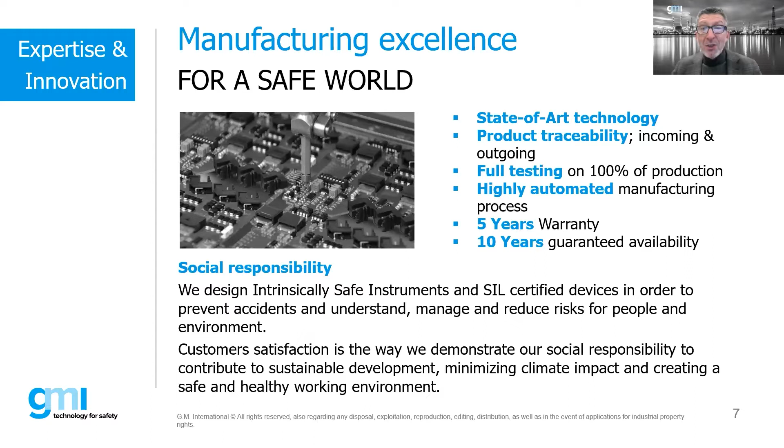I was discussing this with our new general manager the other day - our products are a very, very narrow portion of the overall cost of the plant, but they make sure the plant runs and remains safe. So they are important products, and we take special care in designing and manufacturing them.

These are the products: IS barriers up to SIL 3 certification, safety relays also SIL 3 certified with and without line monitoring. We have isolators, also SIL certified, power supplies that are ATEX, UL, and SIL certified. We have a line of multiplexers - temperature multiplexers, digital multiplexers, HART multiplexers - and we also run a line of SPDs and some loop indicators.

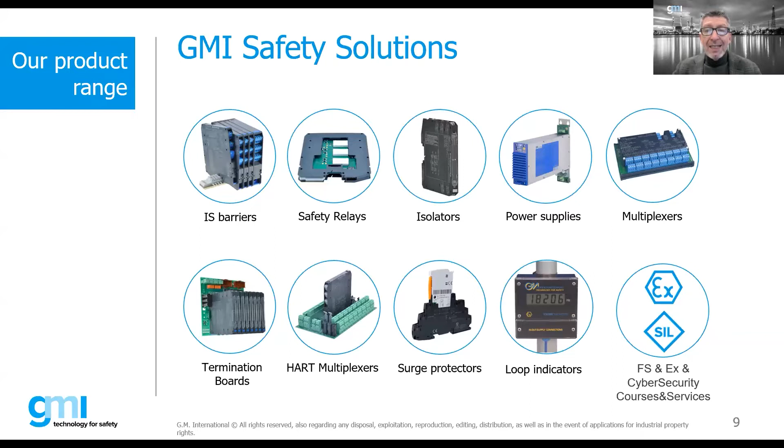As I mentioned earlier, we have a division that runs functional safety and EX, and today also cybersecurity courses and services.

Some of our customers are mostly the MAC and of course EPC companies. We're very proud to supply our products to many OEMs, from ABB to Weatherford - we have many in the US and around the globe. We are also an approved vendor list supplier of many oil and gas companies around the world.

Go next - yes, it's about you. I might take myself off a little bit because I don't see myself. I need to find a way to look a little better. So it's all up to you, guys.

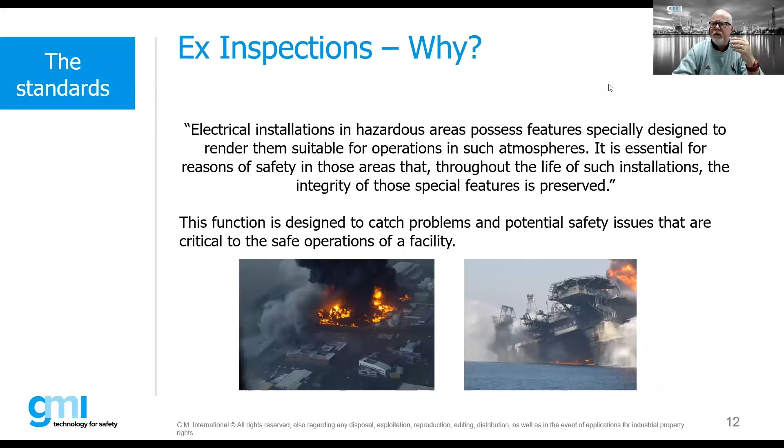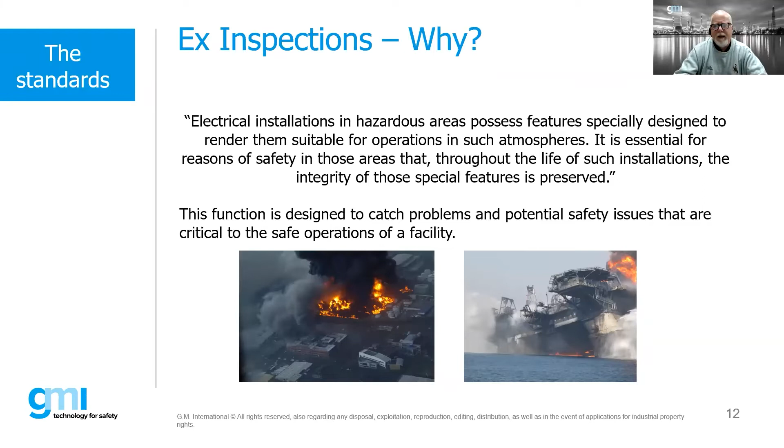Electrical installations in hazardous areas possess features that render them suitable for such atmospheres. If we don't maintain it, inspect it, and do the right things, we're really throwing good money after bad. It's critical that we're all taking an active role from an inspection standpoint, even though that may not be my job function all the time. If we're all taking part at different supply chain avenues, we can help minimize these types of mistakes.

The main standard for those interested in inspections is the 60079-17 standard. This is kind of the Bible, if you will, and everything we're talking about today is pretty much out of those standards. The good thing is the base standard is the IEC version, but most countries have adopted the -17 standard as a country-specific standard. There's very little deviation between the IEC standard and the international, European, US, or Australian standards. Other countries have variations of the theme, but the base document is that 60079-17.

You will see this referenced from a lot of clients and customers. You'll see inspection check sheets that basically have this document referenced, and we'll show you some examples of these check sheets and what we use when doing inspections.

However, it's important to understand that a lot of major oil and gas companies will actually go above and beyond what's required in the -17 standard, because the -17 standard is an international standard—it's basically the bare minimum. So many companies take the requirements out of the -17 standard and go above and beyond that. They may require inspections to country-specific wiring regulations, or say that's not necessarily good enough, we want to go above and beyond.

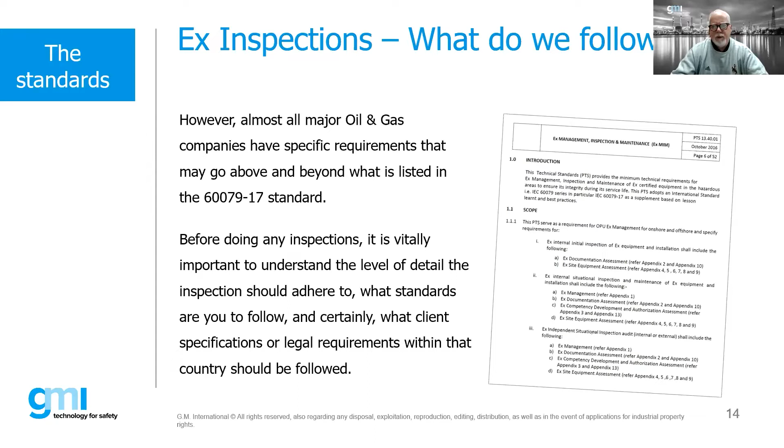It's critically important as an inspector that we understand very early on when coming to do an inspection: am I doing it just to the 17 standard, or am I also making sure I'm compliant to a different standard that may have requirements above and beyond? Don't just use the 17 standard as the end-all be-all. Make sure we understand all the other project or client-specific requirements that may be involved in inspections.

So what do we need to know before doing an EX inspection? These are our check sheets—I always ask questions, and we should have this available before we actually get into the inspection. Country regulation and client specifications are pretty much a given. What grade of inspection are we going to be doing? There are three different grades defined in the -17 standard: visual, close, or detailed, which we'll talk about a little bit later.

We also need to have bills of material, drawings, and certificates—certificates are extremely important to have access to when doing our inspections, and I'll share with you why that's important later on. We need an EX register or dossier, and of course data sheets on the equipment.

Obviously we need to know the area classification. If we're building a skid package, what zone, category, EPL, where's it going? Is there any previous inspection schedule or records? What are our gas groups? What's our ambient temperature range? What's our T-code requirement? What are the environmental issues? Is there some minimum IP ingress protection rating we need to comply with?

Is there any specific material requirement we need to comply with, such as maybe we require 316 stainless steel as opposed to cast iron or something like that? And the important thing is this X condition when we start looking at certificates. X conditions are critically important to understand when doing inspections, and I'll talk about this a little bit later. If you don't have this information, we're a little bit blind—we don't know where we're going, so we need this information to understand what we're actually wanting to do.

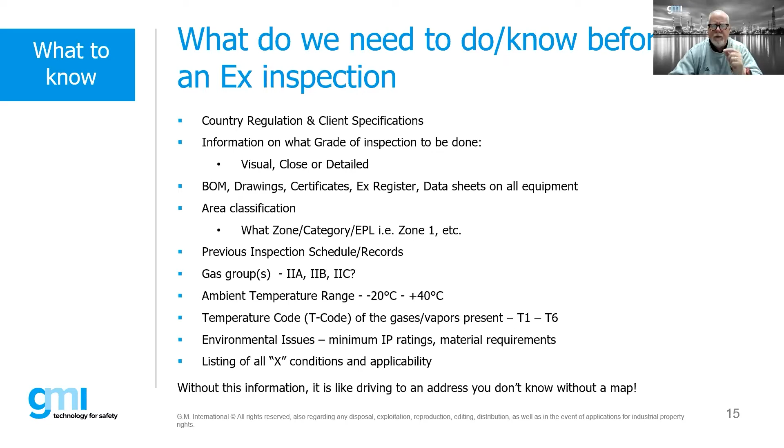So, as I mentioned, the -17 standard is our standard. We have grades and scheduling of inspections. The grades of inspections are visual inspection, close inspection, and detailed inspection. A visual inspection is where we just walk out and start looking at the product, looking for any unauthorized external modifications, maybe a missing bolt, a missing label, or damage to a cable or something like that.

This is typically based upon something that's already been installed. We're going out there maybe a year later to check it out. We've already done our initial detailed inspection at the factory or when it was first installed, but visual and close inspections are typically those inspections that are ongoing as part of our normal maintenance procedure.

The difference between a visual inspection and a close inspection is that a close inspection is where we start using tools. If we need to get up and see a piece of equipment high up on a ceiling, maybe a light fitting, now we need a step ladder, we might need a flashlight. So now we're looking very closely at things like labels, putting our hands on the equipment, checking the tightness of cable glands.

The important thing to note is that visual and close inspections can be done without de-energizing the equipment. We can do these types of inspections while the equipment is energized and operational. This is something that typically should be done by the end user, doing this on a regular, routine basis.

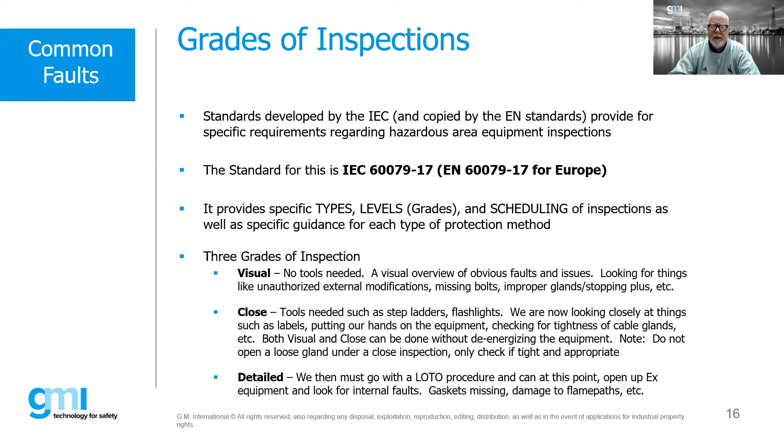The important thing to note about a detailed inspection is that it is a requirement under the -17 standard that every piece of equipment, before it gets put into service, must undergo a detailed inspection. That can be during the construction phase, and once it's been installed, we follow up and have somebody else come in and do a detailed inspection on it, making sure it's okay to be energized. So it's important to do that detailed inspection before the equipment gets put into service.

Before it is put into service, it must be given that initial detailed inspection by a competent person, taking into account other relevant standards that might be applicable, based upon a UK standard, an NEC standard, a different IEC standard, and so on. The initial inspection is to make sure we check that the selected type of equipment and protection are appropriate. Periodic, sample, and continuous are basically the types in which we will undertake inspections.

The important thing from an EX perspective is that every piece of EX equipment must be inspected no longer than every 3 years, based upon the -17 standard. Now, how we do it can be either during these periodic, sample, or continuous inspections.

So continuous inspection could be a situation where maybe we've got a motor that is due for an inspection, but yet we have to go out and actually do something, like check the insulation resistance on a motor during our normal maintenance operation. During that normal maintenance operation, we can also do some of these other inspection activities, so we don't necessarily have to dedicate a particular person or time. It can be done by the normal maintenance procedures that are taking place.

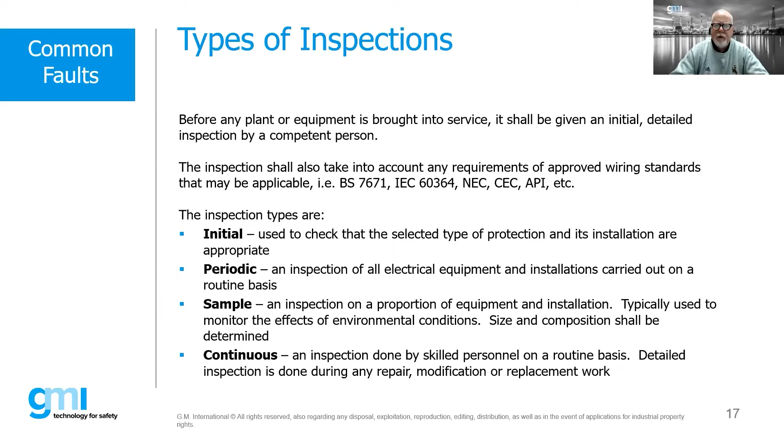So in the -17, we have different inspection charts that we use. These are guides, and they provide details as to what should be inspected for each type of protection method and for each grade of inspection. So when you look up the -17, in the very back of them, they'll have these various inspection charts.

These charts are critical and important for everybody to understand. If I'm building a piece of EX equipment, or a bunch of EX equipment, incorporating them into, say, a skid package—it could be a hydraulic power unit, or a water desalinization skid, or whatever it is—we might be combining a bunch of EX equipment together. We want to make sure we're going through this detailed inspection and using these inspection check sheets.

You'll notice these inspection check sheets are really only for D, E, N, I, and P. There are other EX protection concepts outside of those five, but most of those are usually at the component level. For example, EXM, encapsulation, is generally a component part you might find inside another piece of EX equipment, such as a light fitting. So the light fitting might be EXD or EXE, but some of the components might be encapsulated, having other protection methods. So we'll follow one of those other charts to make sure those components are acceptable.

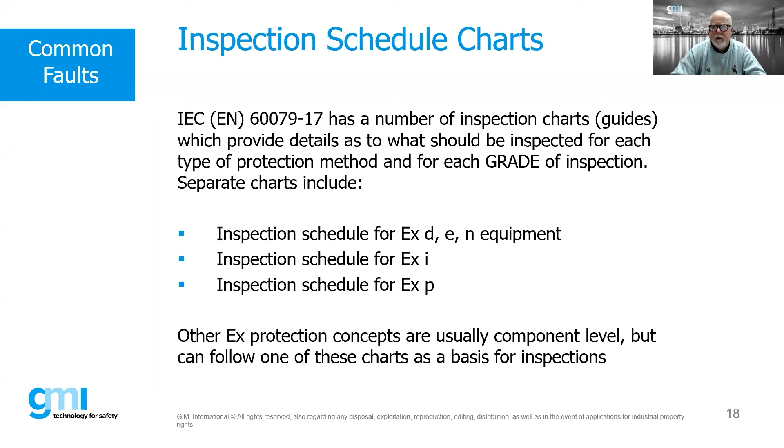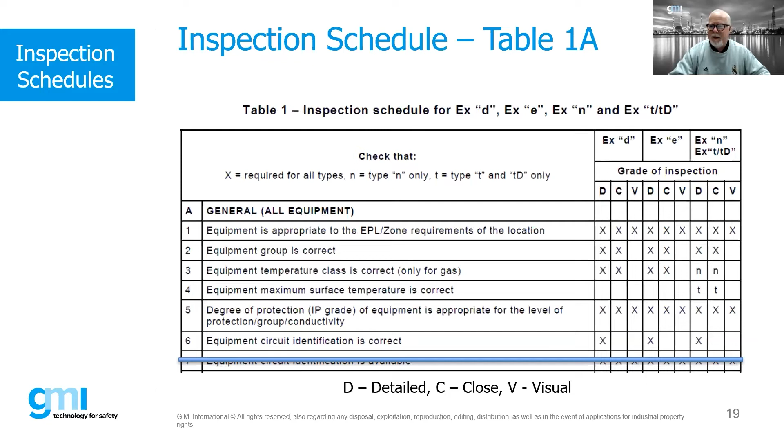So these check sheets are guides for inspectors to use so we understand what we need to look for. It's important for everybody to understand what these check sheets are, especially if you're having to deal with inspectors, because you want to check your own work and your equipment that's already installed. Before an inspector comes out, if you know what that inspector is going to be looking for, you can address some of those issues before people like me even show up at your facility. It always makes things go much quicker, faster, and generally less expensive—we want to catch these things before they happen.

So conducting an inspection requires careful consideration of many things: the knowledge, skill, and competence of the inspector. Within the -17 standard, it does give some references stating what an inspector should have knowledge of. So it's important to understand, if you wanted to be an inspector, what the qualification requirements are based upon the IEC standard. Again, what is our scope of inspection—are we inspecting everything, or just a handful of items? And again, type and grade, the documentation, availability of facility personnel to assist.

If I'm going to go into a facility to do something, generally as an outside agency, I need somebody there with me to walk around, because I don't want to be shutting off things or de-energizing things. I really don't even want to open things up—it should be the client opening those things up, because if I open it and break it, that's my responsibility. Do I have access to it? The types of equipment to be inspected, and again, the environmental conditions.

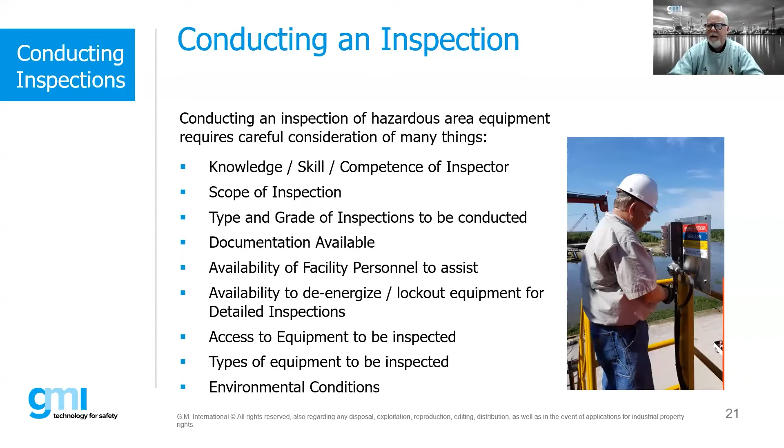So here's a couple things you want to keep in mind. We don't want to take equipment into a hazardous area that's not suitable for that environment—cameras, key fobs, computers, and so on, unless they're rated for it. Opening energized equipment in a hazardous location without a gas-free permit is a big no-no. We don't want to operate those controls without facility personnel present. And don't skip recording anything you believe may be incorrect or unsafe.

It is always better to write something down that you think might be an issue. You can always go back and look at the documentation closer to find out if it's truly unsafe or done correctly. But if you doubt something, go ahead and write it down. It's always better to be safe than sorry.

It's an easy one. Which one of these is not a grade of inspection between visual, initial, close, or detail? One of them is not actually a grade of inspection. It should be easy to answer because you just mentioned it several times. Grade of inspections—besides, one is not related to grade, but more related to time. But we'll give you a few moments to answer, then we'll show you the result.

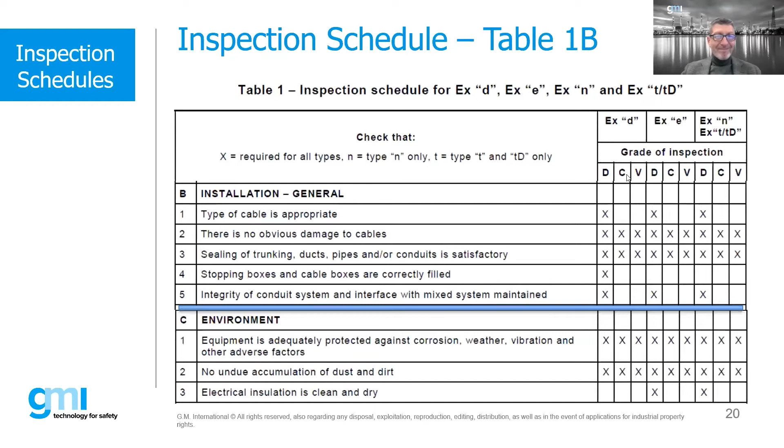Most of you have answered correctly, if I got it right? I've been listening, I wanted to answer myself. Initial was the right answer. So Bob, you are correct. Yeah, initial inspection is a type of inspection. Visual, close, and detailed are grades of inspection. So if we go back to our inspection charts, here's our grades of inspection: detail, close, and visual. So you are correct, great. Well, some of you answered close or detail, so think about it next time.

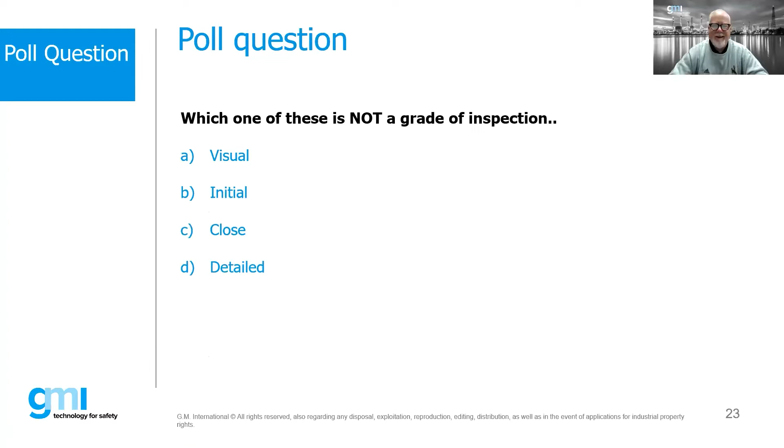Okay, so more polls throughout the webinar, so keep that in mind. Yeah, pay attention, right? Pay attention.

Obviously I know you can't necessarily answer this, but this is something that if you walked across and saw it, you could probably identify as a visual inspection. The issue is obviously we have missing bolts. Unfortunately, this is pretty common, maybe not to this extreme, but it's critical that we have all these bolts spanner tight, or at least as tight as the manufacturer recommends. Because if the bolts aren't tightened up, we don't have an Ex enclosure anymore—we have basically no protection whatsoever. So this would be something very critical that we'd want to jump on right away.

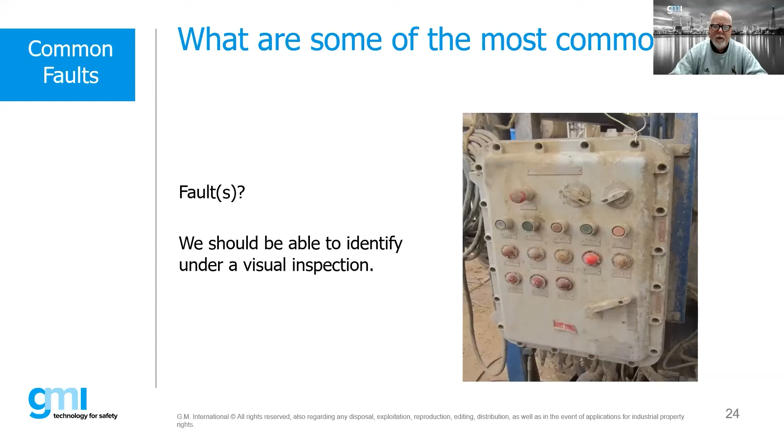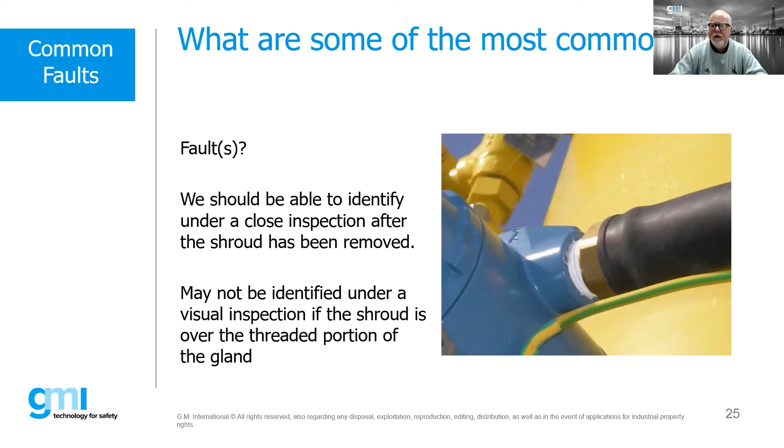And of course, we have to inspect these items at least once every 3 years. So to do a gland inspection, we would have to remove that shroud, right? And so we now have to put new shrouds on or try to slide it back into position.

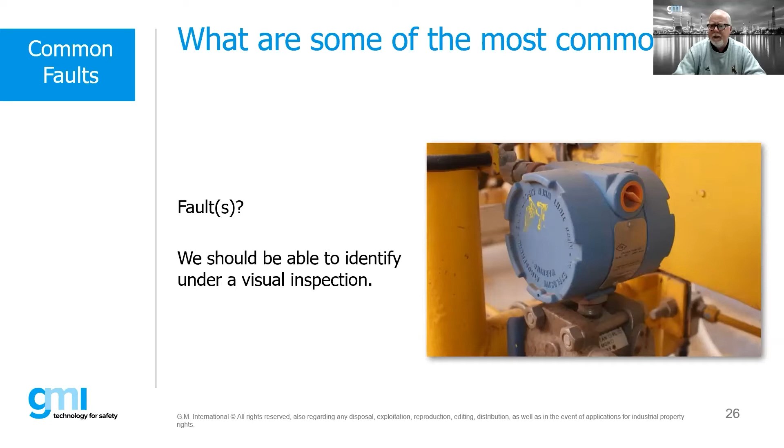Now this is another fault that we commonly see, and it's pretty obvious what we have here. We have what is called a traveling plug, and this is something we should hopefully find under a visual inspection. That traveling plug is this little red plug that you see plugged into that transmitter. A traveling plug is meant to help protect the threads and make sure moisture doesn't get inside this enclosure during transportation. But once it gets installed, we're supposed to remove that little traveling plug and replace it with a certified, in this case EXD, plug. This is not uncommon, unfortunately we see this fairly often, and it's obviously not a good situation. We want to replace that immediately and get a certified plug in there.

Now this is kind of an interesting one. We have a little flame-proof transmitter here, and yet we see plastic glands going into it. If we think about flame-proof, we typically have to use a metallic gland, not necessarily a barrier gland, but a metallic gland rated EXD in order to provide EXD protection. However, in this case, this might be protected by the use of intrinsic safety, and intrinsic safety would negate the need for use of barrier glands or EXD glands.

Now, what would be a dead giveaway telling me this was intrinsically safe is maybe they used blue plastic glands, or the cabling itself would have some visual indication, either by being blue or a tag on there saying this is an intrinsically safe circuit. But I don't have either one of those to give me that visual indication, so I'd say this is a big problem. They've installed it as a D product, but they haven't used the proper glands.

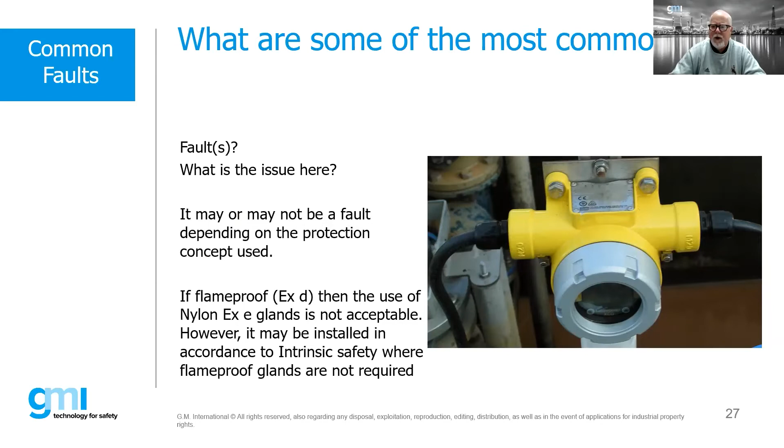So here's something important to understand. Because this product right here could be installed as a D product and have a certificate around EXD, but it could also be an intrinsically safe product depending on how it's installed. So if you look at a label — and this isn't that same product — you'll notice there's a bunch of different EX markings on it.

Let me see if I can annotate this for you. Right over here, you see a marking for EXD, telling us it's flame proof, and here's a copy of the certificate. But then right here, we see it also could be intrinsically safe, and here's a copy of that certificate. Oh, and by the way, here's another protection concept, EXN, and here's a copy of the certificate.

So it's important to understand why I mentioned we should have copies of these certificates available ahead of time. We need to know how they're actually installing this product. Are they doing it as an EXD product? Are they doing it as intrinsically safe? Or are they doing it as EXN for non-arcing? If we don't know that ahead of time, we're just going to be guessing, and we don't want to do that, so we want to make sure we do that.

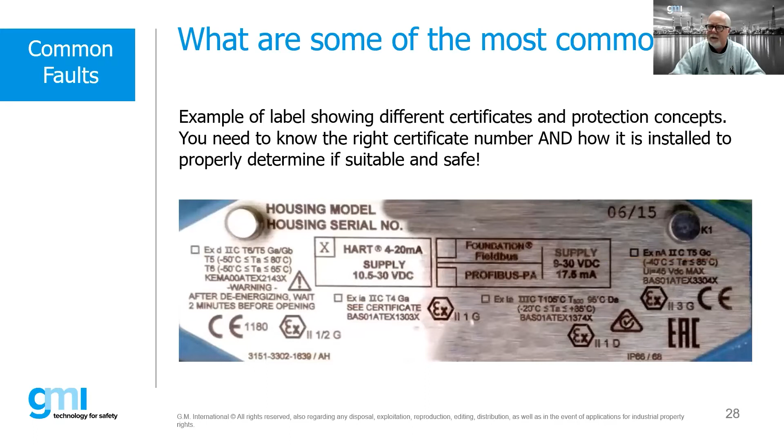Let me see if I can undo or clear my annotations, and then we shall move on. Oh, I don't want to do that. I want to basically turn to my mouse, and here we go.

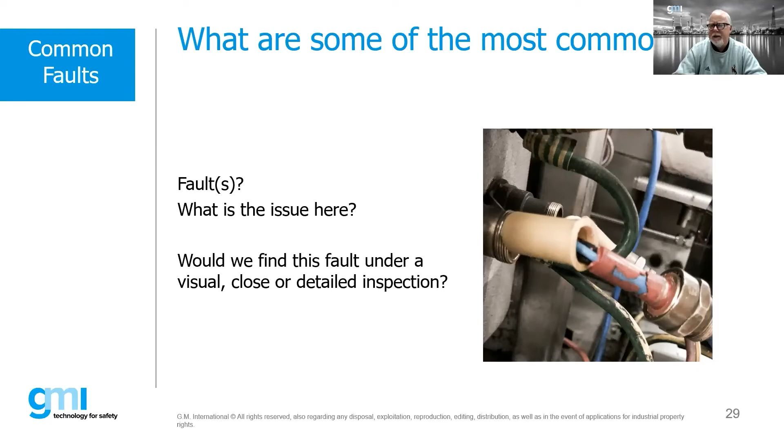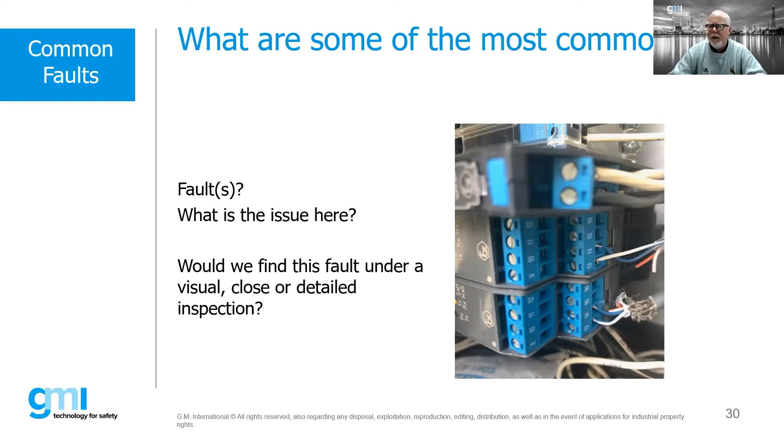Or in some cases, if the nameplate is completely missing, let's get a GA drawing. Let's compare what's actually there versus our general arrangement drawing to make sure we're truly inspecting the right piece of equipment. If there's a piece of equipment installed that's not in our register, or not accounted for, or it's been replaced, those would all be faults.

So we can't just necessarily - well, in some cases it's okay to replace an item with another suitable item, but we should have taken note of that and recorded it in our register, and updated information on the new product replacing the old product.

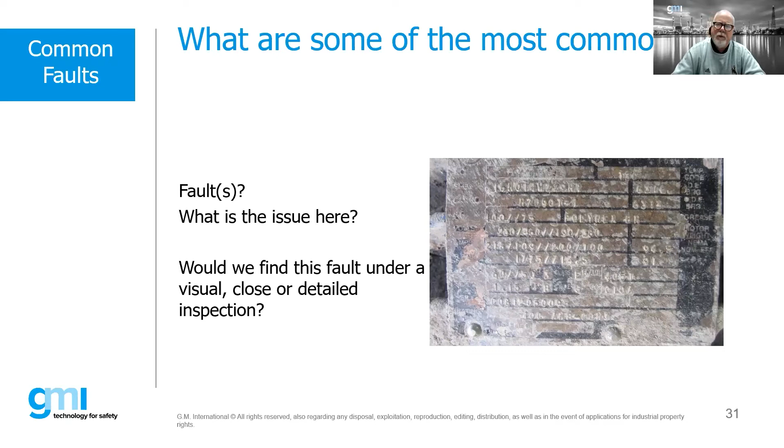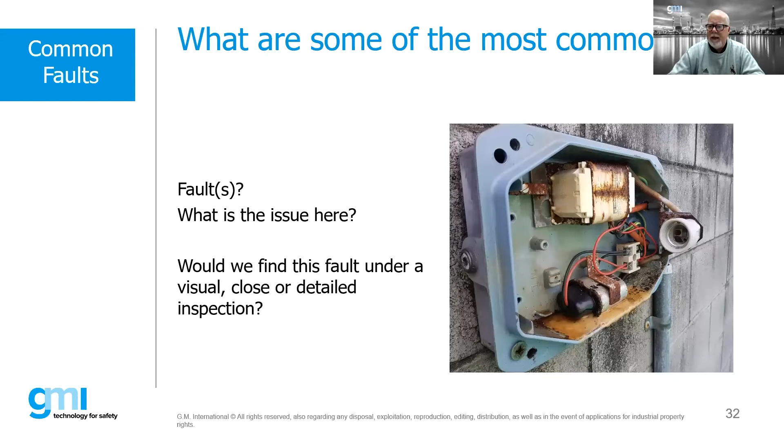So this is a light fitting in which obviously moisture was getting on the inside, and we may or may not have been able to identify this under a visual or close inspection. But under a detailed inspection, we can see we're having some problems here. In this case we've got electrical components potentially sitting in water, which is not necessarily a good scenario. This would be something we'd definitely want to take note of and make sure the client is aware of.

We have had 11 - wow, it's super fast. You guys are following, now they're taking notice. 100% correct - you answered -17. I believe it is -17, and all of you answered in. I don't know the exact time, check this time later, but it was very fast. If you don't remember anything from this webinar, you'll remember -17 as the standard. Great, right? Thank you, guys, you are paying attention. Well done, well done, well done.

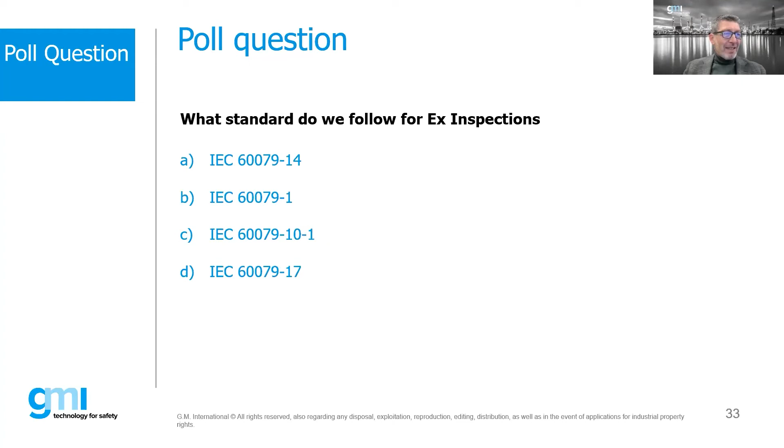What I would do in this scenario is I would write it down and say, hey, Mr.

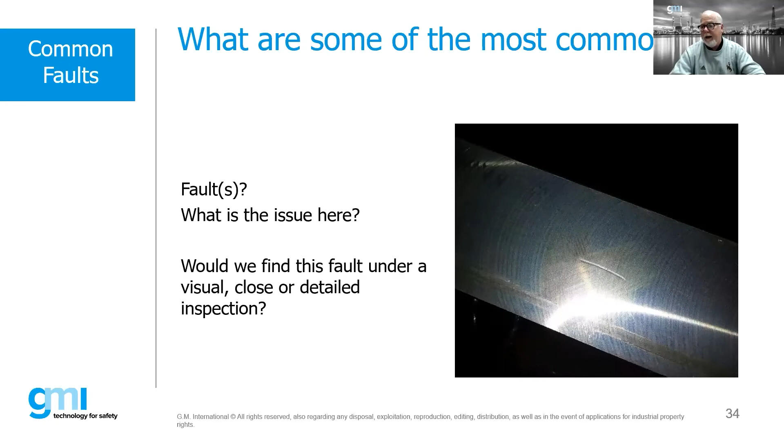Customer, this is obviously something that was done someplace, somehow, somewhere, either at the manufacturing side or maybe after the fact. And you, Mr. Customer, should make that determination as to whether or not you feel this is still suitable. But you could certainly argue, and some inspectors could take the approach to say that's obviously damage to the flange, that's an issue, remove it, start over. So there's sometimes gray areas that are not necessarily well defined, and you have to make a judgment call. Always, always, always write it down and make sure people are aware of this. Certainly you're valid in providing your expert opinion, but ultimately it's going to be up to the end user or the regulator to make that determination of whether this is acceptable.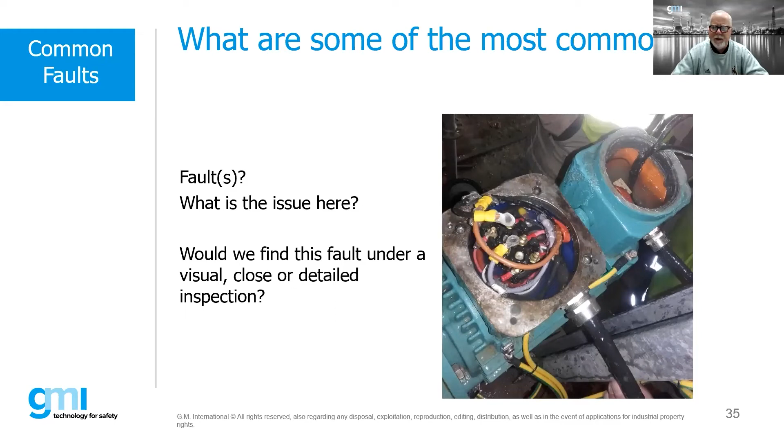When we look at cable glands, again, a detailed inspection, or we might have found this during a close inspection, where we loosened up a gland and all of a sudden the back end came off and we see that the armor is not clamped. So this would certainly require you to inform the client that these need to be reinstalled.

It's also important to understand that when we go in and do inspections, if you notice there's a bunch of glands sitting right behind it, covered with shrouds - if I saw this scenario, and I did, I would immediately say, look, we've got 3 glands that I've opened up, and all 3 of them are wrong. Then I can probably safely assume that we need to open up each one of these glands because I don't feel comfortable, I feel that we have an issue with all of these glands. If, on the other hand, I open up a sample amount, maybe 5 to 10% of the glands, and all of them are properly installed, then I can assume that I've inspected maybe 5% of the glands, everything was fine, we can move on. We don't need to necessarily inspect 100% of every product.

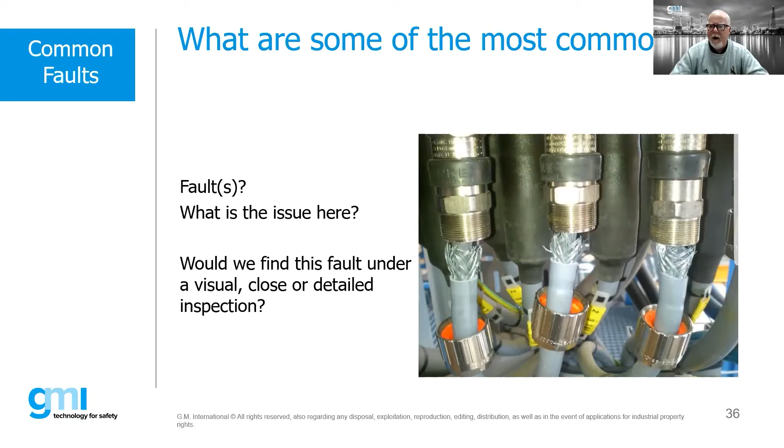Now, what we have here is actually a couple things, but you really can't tell from this picture. This is on the inside of a flame-proof box in which somebody has taken some putty compound to seal up around cables going outside cable glands. But there's another issue here which you don't know - that cable in the forefront is actually light blue, that's intrinsically safe cable. It's okay to run intrinsically safe cable into an enclosure that has a mixture of both intrinsically safe and non-intrinsically safe, but we actually require a segregation or separation of at least 50 mm between those cables, unless those cables happen to be shielded or armored. Now, what happened in this panel, in another picture, is that they actually came very, very close together and defeated that 50 mm separation. So that is an issue as well.

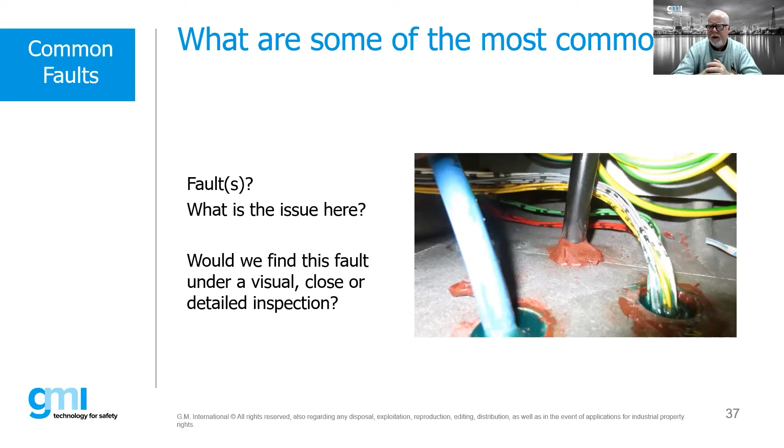When I came in and saw this, I realized you guys got a non-assembly certified product, which would have either an X at the end or no letter, and in turn, you populated it yourself. This is not acceptable. So in this case, we actually had to take pictures of this, send the boxes back to the manufacturer, who in turn issued a new certificate, a new label, and put new labels on it. And of course, that costs time and money, so we don't want to do that if we don't need to.

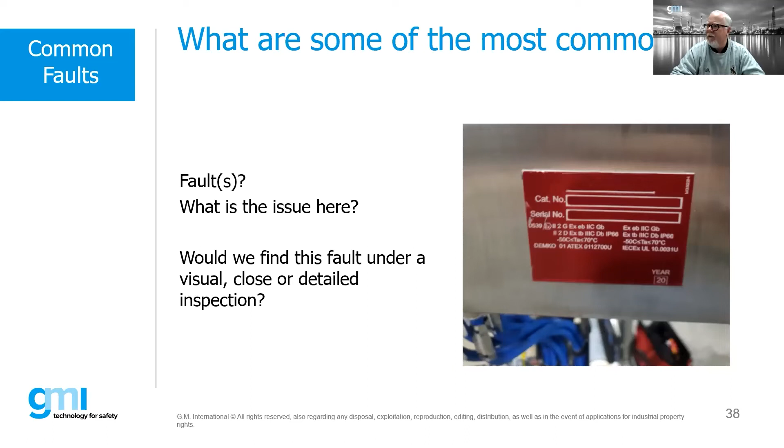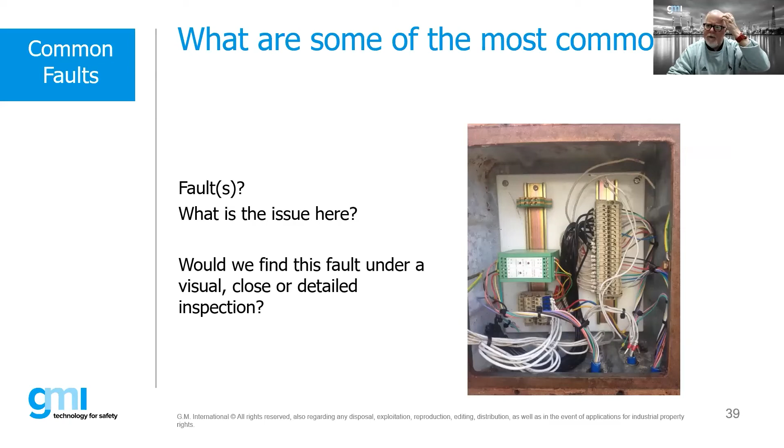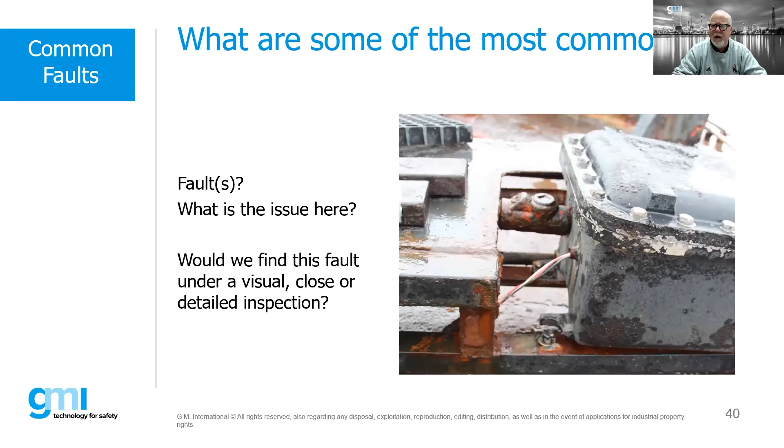This is fairly obvious, something you would see. That's an explosion-proof or flame-proof box with a seal fitting or stopper box, but due to corrosion it has disappeared. So even though we have all those bolts nice and tight, we're now missing an explosion-proof seal-off, and that is definitely a dangerous situation.

Here's a scenario where we're opening up an enclosure, looking at things like the gaskets if they're built in. This is fairly common - sometimes the glue might wear out, and then when we close it up, that gasket is sitting in the flame path. So we've violated the ingress protection requirements for a high IP rating, and also defeated the flame path because we've increased that gap. If there were an explosion on the inside, it probably would not be able to properly withstand it and cool it down. So in this scenario, we'd want to replace that gasket.

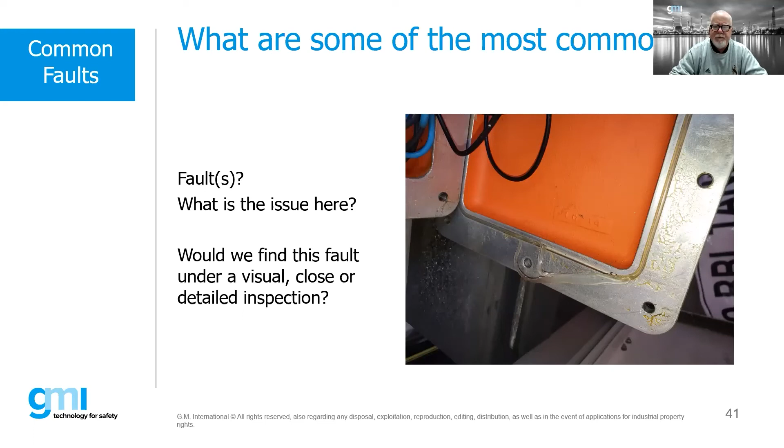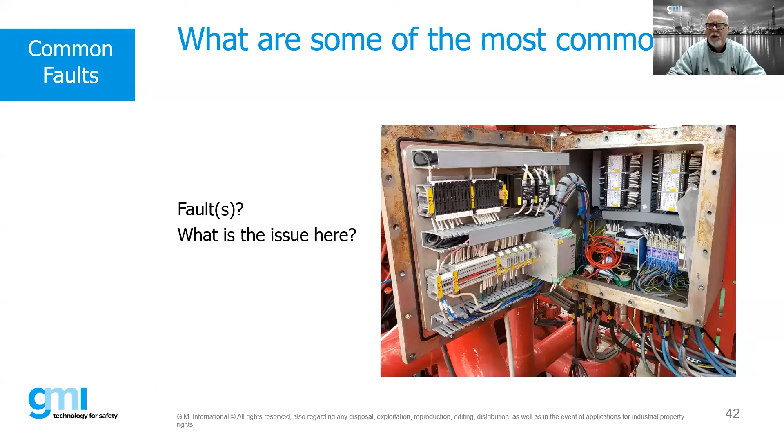That requires a reevaluation of this panel, because now we're doing something outside of the original design. Even though it looks pretty good, as far as we know there may be some separation issues on IS and non-IS, but everything looks pretty tidy. However, in this instance, we didn't know until we got the drawings that there were components not originally part of the certification. So it's critical to have these drawings before we do our inspections.

So when we're doing a full inspection, we understand that this product has been installed in accordance with the requirements of the manufacturer.

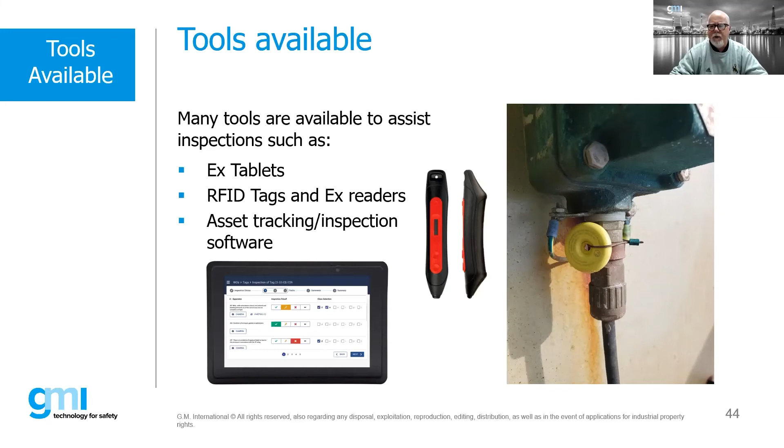Most of the time, we still do them by pen and paper, right? But there's a lot of tools available to minimize the actual hard work you need to do. Many oil and gas clients have standardized on various software packages, and this is what a lot of people utilize today.

Okay, so I think this is our last poll for today. Which one of these protection concepts does not have an inspection schedule chart? We have EXD, EXE, EXM, or EXP.

One of them does not have its own specific inspection schedule chart, and you'd have to follow the schedule chart of the main certification. Some of them might be component level certification, so you have to follow that of the enclosure or the installation, the main certification.

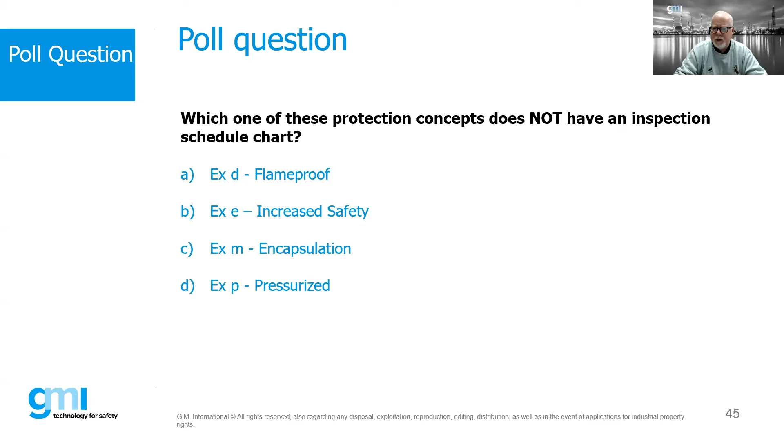It was encapsulation. Encapsulation, I mentioned that early on, is usually at a component level, so we don't have an inspection chart for encapsulation, but we do have them for flame-proof, increased safety, pressurized, as well as intrinsic safety.

So just some key points to remember. Again, when in doubt, if you think it's a fault, write it down. Become competent — go through an EX competency course to understand more. We offer what is called the IEC EX Certificate of Personnel Competency Program. It's a great place to start.

Here's one thing. I've been doing this for many years, but I always find things I've never come across before. Most of the time you've seen it, you've dealt with it, but don't get cocky. Don't become arrogant. Realize that you don't know everything. Always refer back to the standards.

The more you know about the standards, the more you understand what an inspector is looking at. There are times people have said, wait a minute, we don't think this is an issue, and this is the reason why. I'm always willing to listen, because sometimes people are right, and I'll say okay, I get what you're saying. Or I'll say, no, it says this right here in the standard. The important thing is we don't want an adversarial relationship. We want to work together to make this right. But if you're being arrogant, acting like you know everything, that doesn't help the situation.

Never let outside influences affect your judgment. These are safety critical functions — lives depend on your work. And here's the other thing: regardless of whether you're officially inspecting equipment systems or not, do it. If you see something that doesn't look safe, report it to your supervisor.

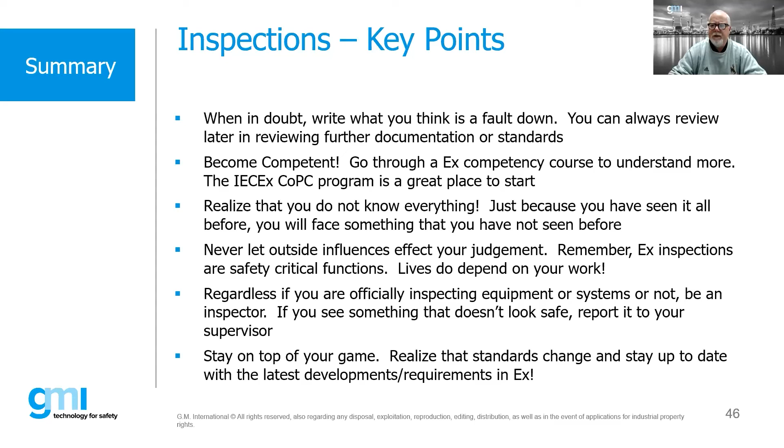Stay on top of your game. Realize that the standards change — generally every 5 to 6 years. There are going to be some new changes in the new installation design standard coming out next year, some big changes. The inspection standard hasn't changed in about 6-7 years now, and I know there's some move to make changes on that. So stay on top of it. And again, safety begins with you.

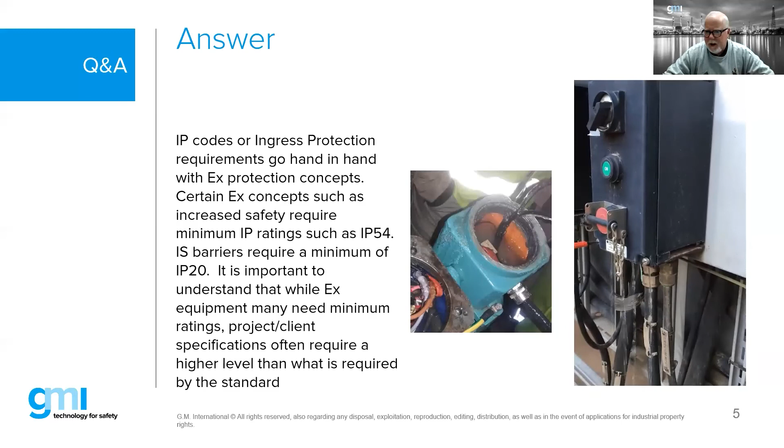Great answer, Bob. So here's the next one: what is the relationship between IP code and EX protection? Is there a relationship? Yeah, there is. There are minimum requirements for ingress protection. We saw that box earlier which was filled up with water. Generally speaking, EX equipment requires a minimum of IP54 ingress protection.

However, just because that's the minimum requirement doesn't necessarily mean that's what the project requires. I've seen many projects that require a higher level of IP ratings. You can see that little control station on the right-hand side as they're opening it up, water is obviously leaking out. Now that enclosure is actually an IP66/67 enclosure, but the way it was installed—you can't see it from this video—it most likely had a gland on the top that wasn't properly seated, which allowed water to accumulate inside the box, and therefore now you see all the water leaking out.

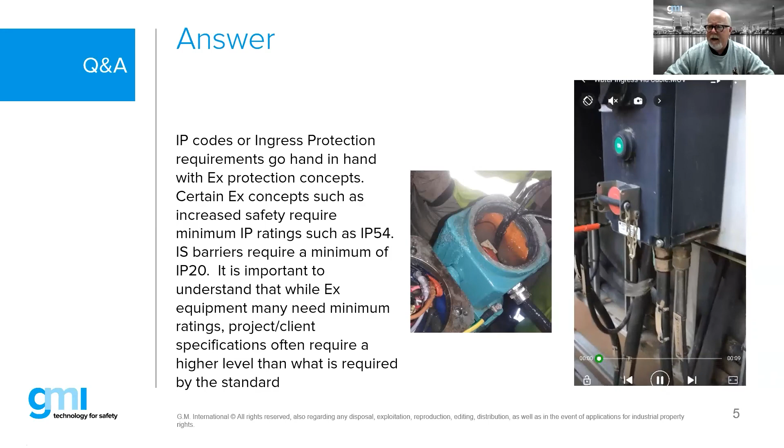Okay, let's move forward because we're closing in on an hour. Inspection on the EXD barrier gland: many of them are not able to be split for inspection due to being potted with too much casting compound, and many are filled up with too large cables. So not properly installed—yeah, it has been a big issue.

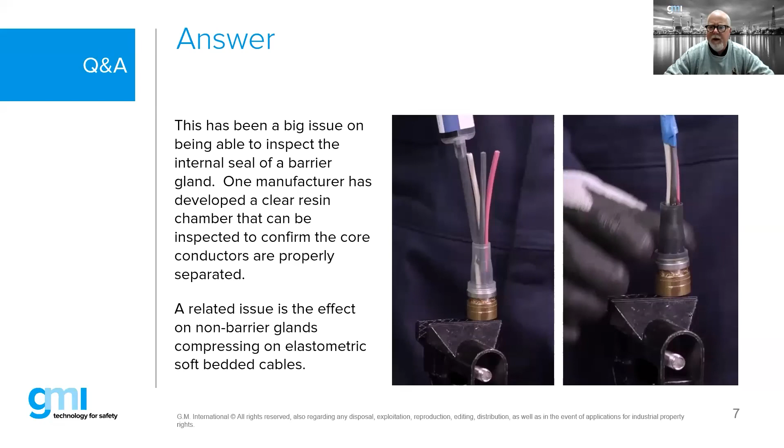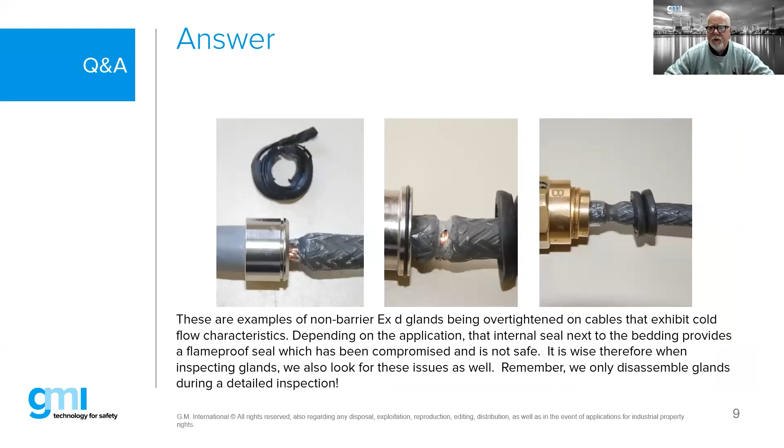There are some gland manufacturers now taking barrier glands and making clear pots to be able to inspect them. What we don't want to see is gaps. We want to be like the right-hand side, where you can see the compound all the way around those individual core conductors. That's important, like we saw earlier. The one on the left-hand side is incorrect, and here's where we could have damage to cables from non-barrier glands.

Are there courses available to become an inspector? Yeah, there are different courses around the world available. The two major ones are COMPEX and the IEC-EX Certificate of Personnel Competency.

Here's the thing - both of these courses usually take anywhere from 2 to 5 days. We have people that come out of these programs and say, okay, now I've got my piece of paper. But just because you have a piece of paper doesn't make you necessarily competent. It's basically giving you the benchmark to say, okay, you can start doing this. But it ultimately comes from your experience and working with other competent people to develop your level of competency, and you're always learning.

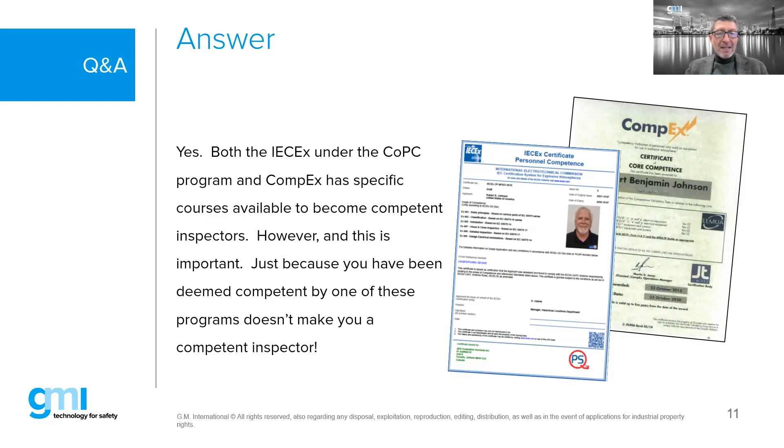Right, so you need to train some younger guys. So how often does EX equipment need to be inspected? I remember you mentioning - honestly, this is the first time I'm seeing this, so I didn't have time to go through this presentation before the webinar. But I remember you mentioned 3 years, right? Yes, every piece of EX equipment shall not exceed 3 years. But there are some specific examples where it has to be more often.

Movable equipment and handheld equipment need inspection before each use. All equipment shall be submitted to a close inspection every 12 months. For example, battery enclosures shall be given a detailed inspection every 6 months. So there are some deviations, but basically every 3 years is what the IEC standard says for us to do at least a visual, close, or detailed inspection.

Okay, we come into an hour. I saw somebody's already trying to move out, but let's give it a second for a few more questions. Do you treat all faults you find the same way, or is there some way to determine which are more critical than others? I guess - yes, let's see a chart.

Yeah, so this isn't in the -17 standard, but going through the -17 standard it tells us yes or no - is that a fault? Yes, it is. So now that we've determined these faults, we have to determine how critical these things are. Companies will use something like this chart. This isn't part of the standard, but some companies will say, if it's a code 1 or priority 1, this requires urgent attention - that could be something like bolts missing on a flame-proof box, and so forth.

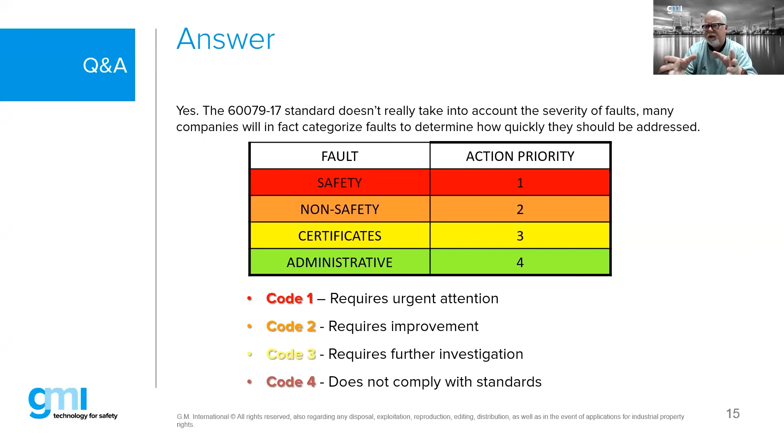For example, an administrative code 4 means it doesn't comply with the standards - maybe it's missing a label. Does that mean we have to shut down this facility because it's missing a label? No. So we weight these faults based upon a prescribed description. This is usually come up by customers, clients, and best practices, but it's not within the -17 standard - this is above and beyond that.